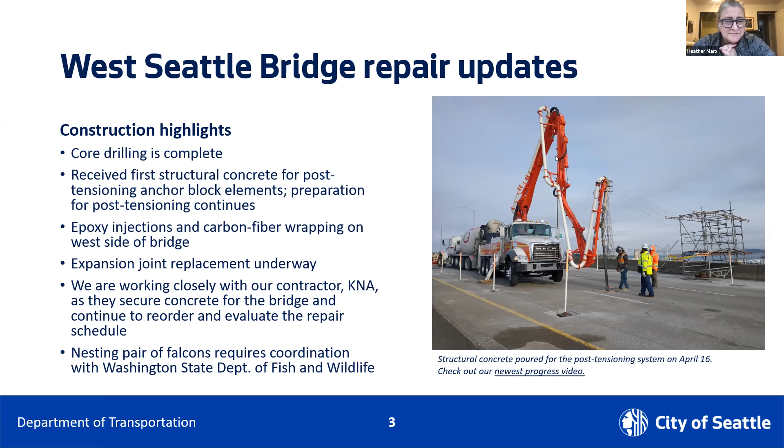They're just above the Pier 15. We've worked very quickly with Washington State Department of Fish and Wildlife to get a falcon management plan together. Our permitting team is really excellent, and they turned it from a falcon crisis into a falcon plan, an approved falcon plan, in less than a week, which is pretty impressive.

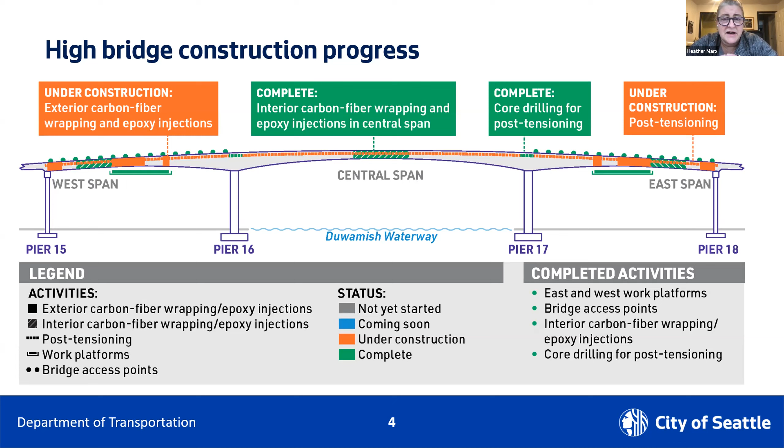Next slide, please, Madison. This hopefully by now is a familiar graphic. The orange shows you the parts that are under construction, so exterior carbon fiber wrap, as well as the concrete pours for the post-tensioning work. We have finished core drilling for post-tensioning, and we have completed the center span interior carbon fiber wrap and epoxy injections. We're waiting for that last concrete. Next slide, please.

Oh, my Lord. Seriously, Michael, half of what I've done the past 2 years, I never would have expected to do.

So here are the key elements in the rehabilitation schedule, and these are the pieces of information that are going to help us know when the new opening date is. So the key inputs into the schedule are concrete availability and completing those structural pours. The other project risks are supply chain. This is something that we haven't experienced too much of, but we have learned not to say never.

Worker shortages is a big deal, particularly when it comes to Burlington Northern Santa Fe. They have to provide flaggers when we do work over the rails. And so they are having some shortages, and so getting those folks assigned has been a challenge. It's sort of moved up the list in terms of things that we're concerned about. COVID continues to present a problem. Obviously, if somebody has a close contact or a positive test, there's still quarantining that needs to happen. So that can slow us down.

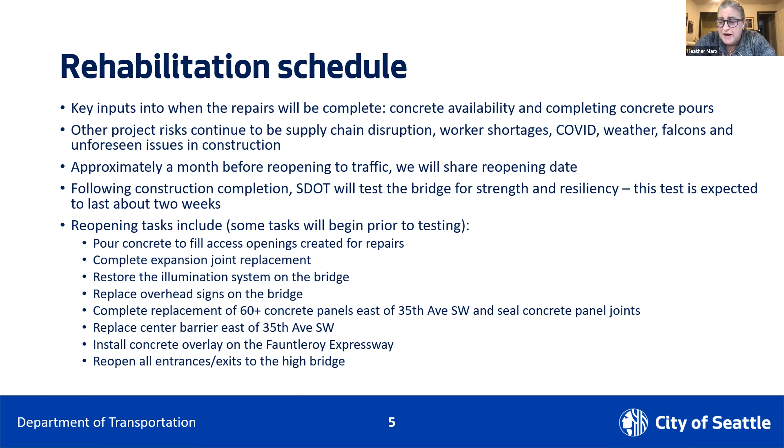We have to replace the overhead signs on the bridge and replace about 60 concrete panels east of 35th Avenue Southwest and seal those joints. We have to replace the center barrier, install some concrete overlay on the Fauntleroy Expressway, and reopen all entrances and exits to the High Bridge. All right.

When we had to close the bridge on that fateful day, March 23rd, 2020, we had to do a whole bunch of things to close the bridge and make the traffic system around the bridge work as well as it can. So we have to decommission some of those as soon as we are ready to open the bridge. We have to restripe. We have to remove the bus only lanes that direct buses over the low bridge. We have to remove the low bridge restrictions as well as the detour signage.

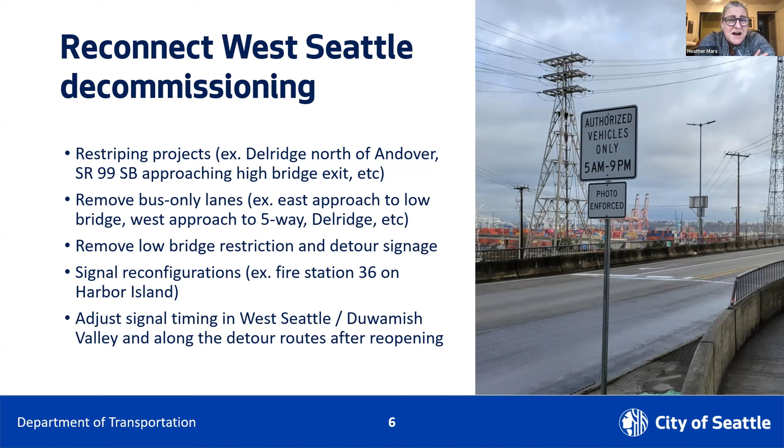We have to do some retiming of signals, for example, around Fire Station 36. And of course, adjust signal timing throughout the West Seattle Peninsula and the Duwamish Valley along the detour routes. So that's the work that once we're done with the construction, there's still a lot of work to do. Next slide, please.

We have pulled almost all the workers off the low bridge and put them on the high bridge because we need to make up time. We are constructing work platforms for that low bridge. We had thought originally that we would raise those platforms into place in May. We have rearranged that to be June. Preparations are underway for the lift cylinder replacement on either of those pillars that turn the leaves to open the bridge. We're also working on a new controls and communication system.

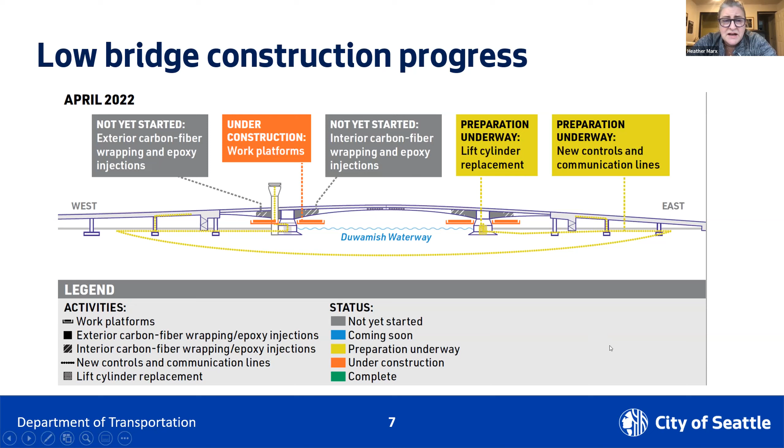Those communication lines used to hang from the high bridge, but when we had that initial scare, we decided it was probably a pretty good idea to bury them under the waterway rather than leave them attached to the high bridge. Once we get those work platforms in, we will be able to start our exterior carbon fiber wrapping and epoxy injections, as well as the interior carbon fiber and epoxy. Next slide, please.

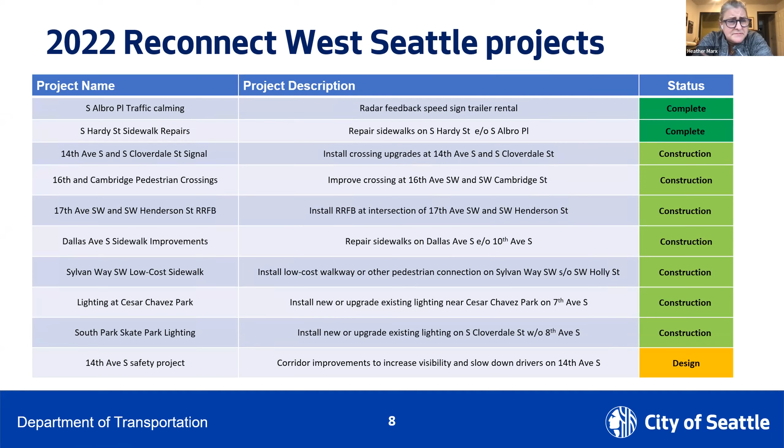So we are working on a bunch of 2022 Reconnect West Seattle projects. Two of them are done. The rest of them are in construction with the exception of the 14th Avenue Safety Project. That's at 14th and Dallas. That one's going to take us a little bit longer than the bridge opening, so that will continue throughout 2022 and possibly into 2023. We also are going to try to do some paving on the detour routes once the bridge is open so that we can bring those up to what passes for good.

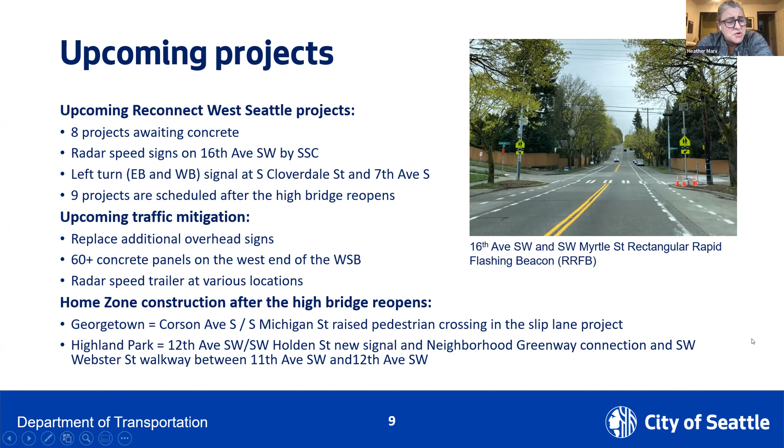Next slide, please. We are still waiting for lots of concrete for some of those Reconnect West Seattle projects, and still planning to do a lot of that upcoming traffic mitigation. And we still have some home zone construction projects that are going to continue after the high bridge opens in both Georgetown and Highland Park. Next slide, please.

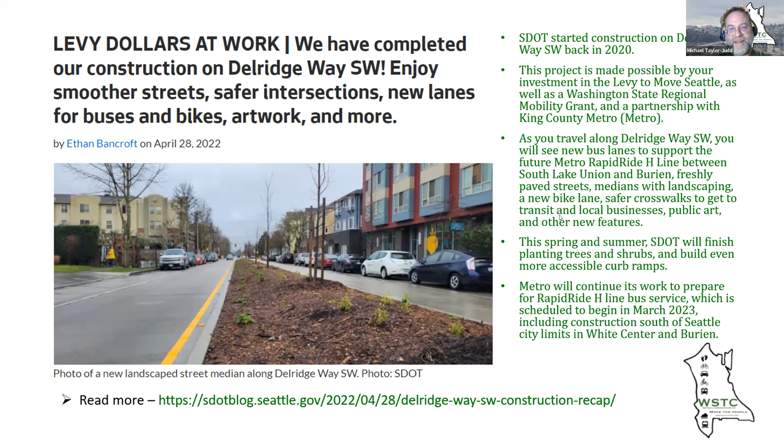And as someone who was around when we first started talking about landscaped street medians and making Delridge look like a boulevard, I could not be more excited every time I drive by and see trees in the middle of our roadway, making us look like we're actually a part of the city and not some little under-resourced area. So some of us at least are very excited down in the neighborhood.

Moving along on our agenda, we have some new friends from SDOT joining us tonight. Chris Eves, a senior civil engineer in transportation operations with freight, and Radcliffe Dacanay, principal transportation planner at SDOT. They're going to talk to us about the draft freight lane policy plan that's being proposed. And then Radcliffe's going to share a little about the Seattle Freight Advisory Board, which is how SDOT hears community feedback from stakeholders on freight, so folks understand SDOT doesn't just come up with all of this on their own, just like they come to groups like us for feedback on buses or other things going on.

So take it away. I believe Radcliffe, you're showing slides. So yes, take it away when you've got a second. Great. Thank you, Michael. I'm glad to be here. Let me find my presentation there. All right. Can everyone see the slide?

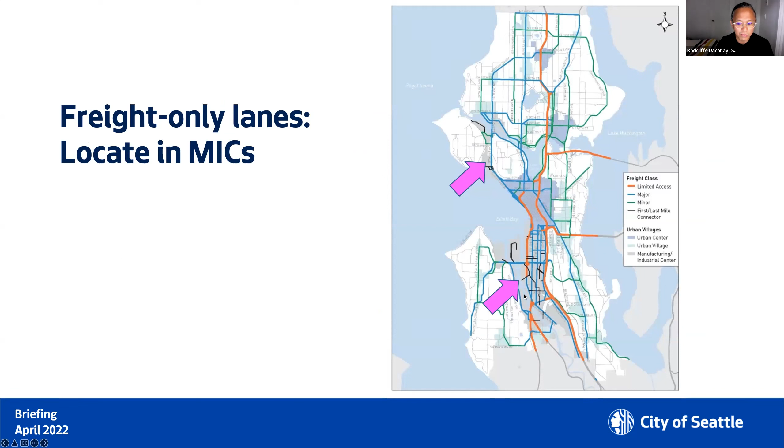And then how might we think about operationalizing this? So I'll use a couple maps to help think through this. For freight only lanes, we would only locate them in manufacturing and industrial centers. So in the north part of the city would be Ballard Interbay, and then in the southern part of the city would be the Duwamish Valley, SODO.

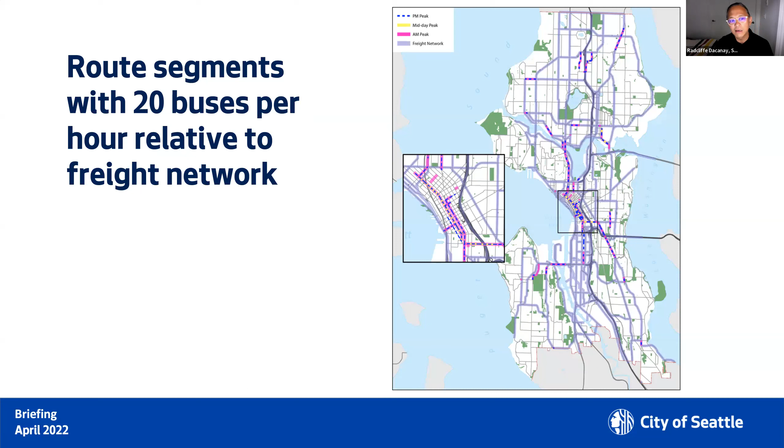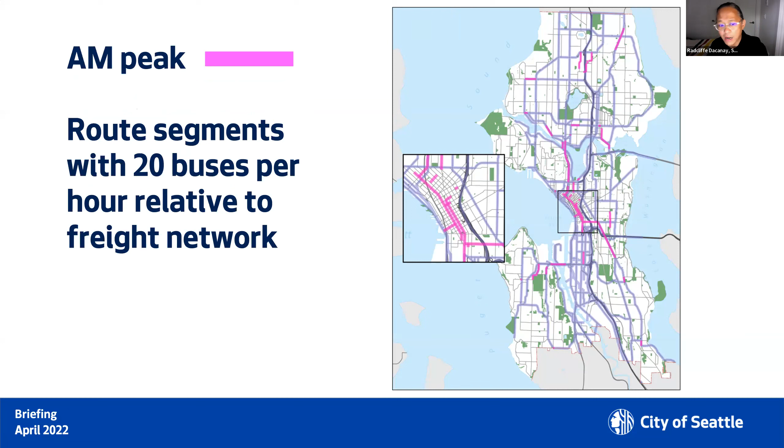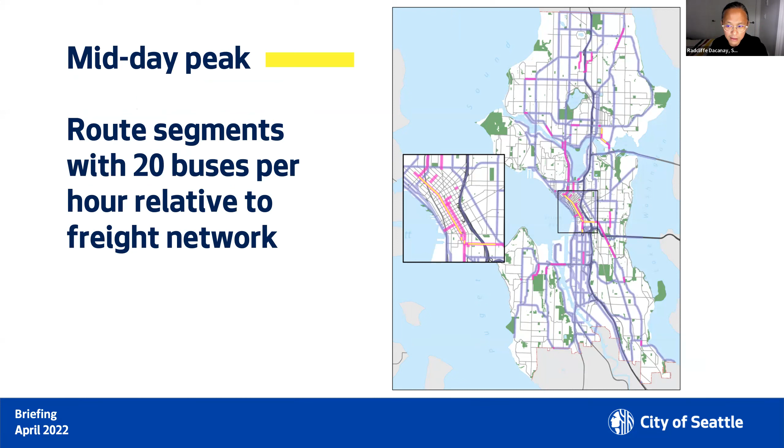And then when we would look at freight and bus, we want to think about systematically where buses are 20 buses per hour relative to the freight network. So just a couple slides here. Looking at the freight network, this is in purple. And then looking at AM peak of where buses are 20 or more buses per hour. And then during the midday, you see that it's primarily 3rd Avenue in downtown Jackson and a few spots up by the university. And then the PM peak pretty much mimics the AM peak.

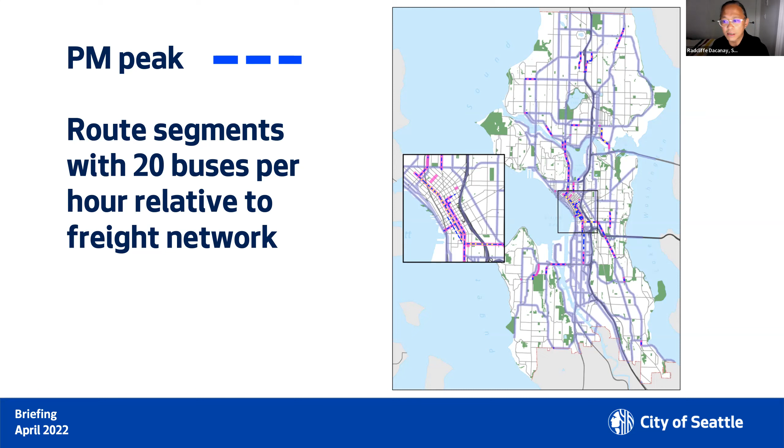So when we're looking at the rest of the light purple there, opportunities for coordination with our program developers on bus only lanes, and seeing perhaps there might be opportunities timing wise, say 9 a.m. to 1 p.m., to use some of the available capacity to have a shared lane with freight and bus. So right now, some potential candidates we're thinking about from a freight and bus lane perspective, mostly in the north part of the city. We've got Westlake, Aurora Avenue, and then 15th and Elliott.

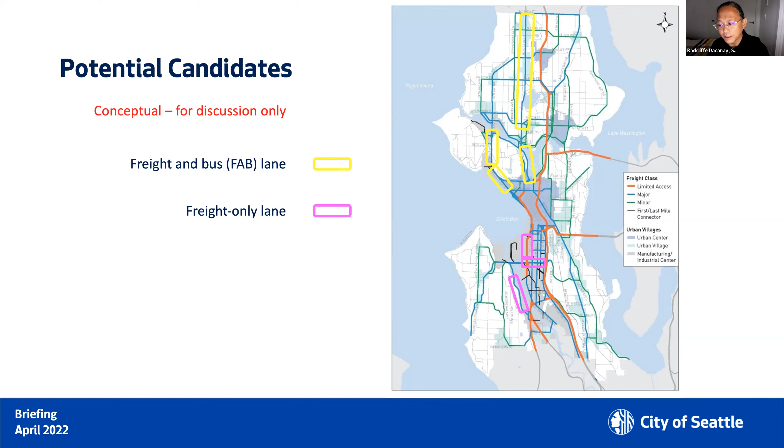For freight only lanes, we're looking in SODO. We've got East Marginal, we've got a segment of Spokane. We've adjusted this to reflect that it would not include the lower bridge. And then also thinking the opportunities on West Marginal. And again, this is just conceptual for discussion purposes only. We haven't really even begun to look at the details of how this could possibly work. Before we would do that, we would certainly do more engagement with the community, do more research on the feasibility of these, but we're just shopping these ideas around internally to see if we might be able to deliver an opportunity.

Still TBD, we thought we might do something this year. That particular opportunity seems to be adjusting. So we're continuing to get feedback from various internal partners, advisory boards, like the Seattle Freight Advisory Board, and then continue stakeholder engagement like this to get your feedback. We need to do a SEPA review, and then eventually get to a pilot project, which is still TBD. And that's it for my presentation.

We can jump into Q&A, or maybe Chris, if you want to say a few words too regarding SFAB and how it relates to this work and SFAB in general. Sure. If you don't mind, I'm going to take a moment and highlight a couple of items that were touched on. There's a reason we wanted to go over 26,000 pounds of registered carrying capacity, because once you have a tractor or a truck and trailer that is registered for that weight, you need a commercial driver's license. So we're looking to have professional drivers be the people who are in, at the very least, the pilot.

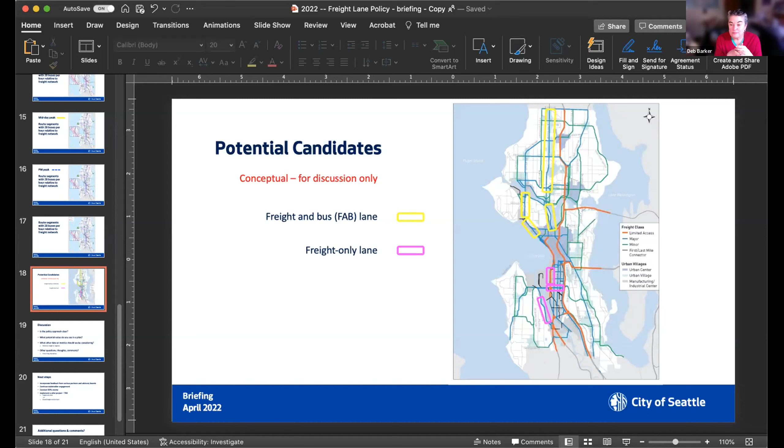That's all right. I typed it over there in the chat because it's kind of for folks who don't deal with that. It sounds really complicated and unwieldy. But I know it's something that's increasingly popular across North America, typically in downtown areas and high pedestrian areas. But it might be really helpful in some of these interactions where we have bikes crossing paths with trucks, really giving the bicyclists an opportunity to get out in front of the trucks before they start turning.

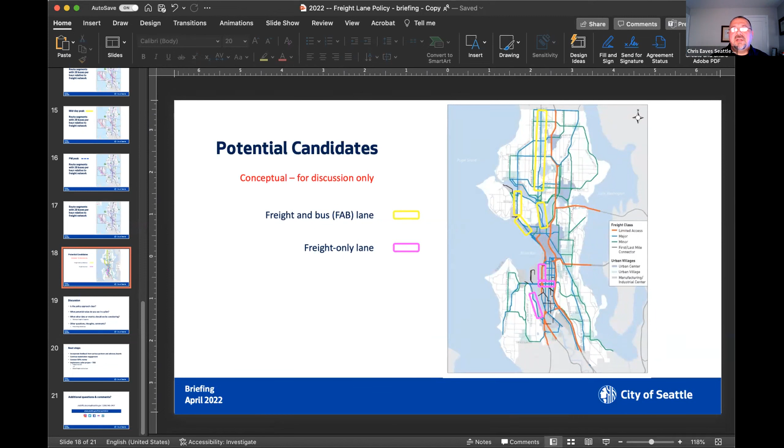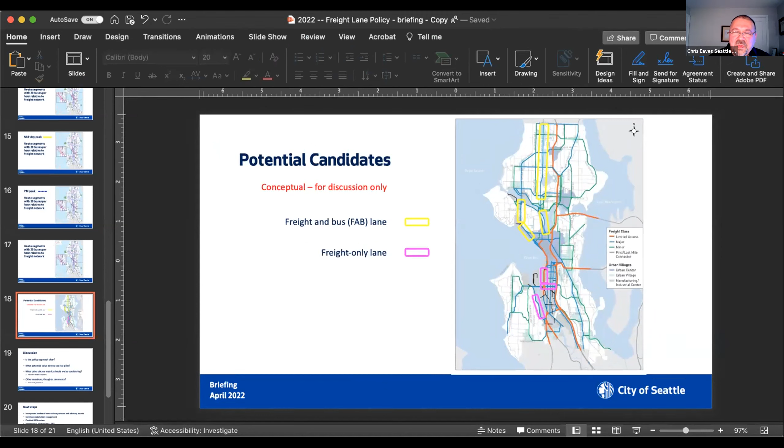Yeah. Okay. I'll do a real quick response, Kate. You can act as a pedestrian as the pedestrian signal moves, so you would be able to use the crosswalk when you have that LPI, leading pedestrian interval. Cool. That's great. That's it for the questions on this topic. You're going to talk about the Freight Advisory Board now?

Yes. I've eaten quite a bit of time, and Radcliffe, I apologize. Okay, thanks. So the Freight Advisory Board, it's exactly what it sounds like. We have a volunteer board who is engaged in goods movement, and we include port and rail, marine, food, especially restaurant. There's a long story, but it's a good story we can try later. We've also included, as one of our members in the past, a bus driver, and we have truck drivers also, to get an idea of where our parallel opportunities exist.

As with many of the advisory boards, these people bring their expertise and their thoughts to us and allow us to put things in front of them and say, what do you think? A lot of our work revolves around looking at designs and understanding why, while something looks really good, it might not be the best for us. That involves turning radii at intersections and a lot more boring things, for lack of a better way of saying it. But it helps us as we try to make sure that our very large vehicles can interact with all our other modes, including the vulnerable users.